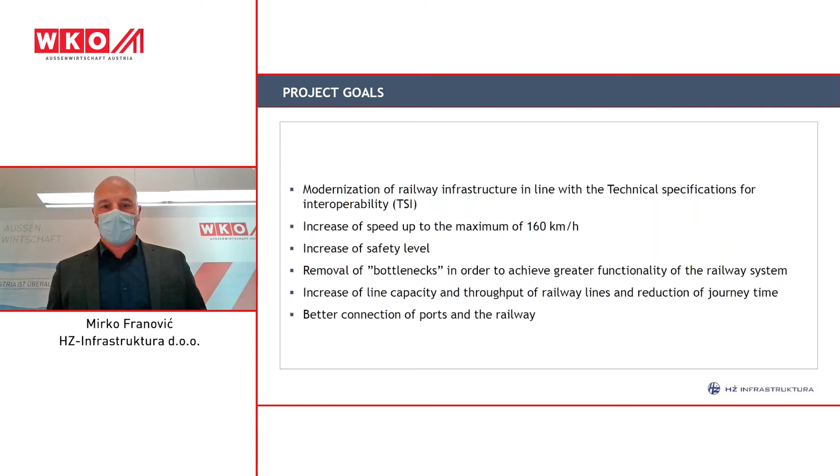So our main objective is to modernize rail infrastructure in line with the technical specification for interoperability, and to increase the maximum speed to 160 kilometers per hour, increase safety level on all of our network, and remove all bottlenecks in order to achieve greater functionality of the railway system. One of the most important goals for us is, of course, better connection of ports and the rail.

So the first project is reconstruction of the existing track and construction of the second track on the section Križevci-Koprivnica state border. This is the most recently contracted contract, and its value is 350 million euros, and we are at the beginning of the construction works on the field. It includes work on reconstruction of the existing line and construction of a second track on the entire railway section, in the length of 42.6 kilometers, and of course all viaducts, bridges and everything on the line is also included. This is done by the Turkish company Cengiz.

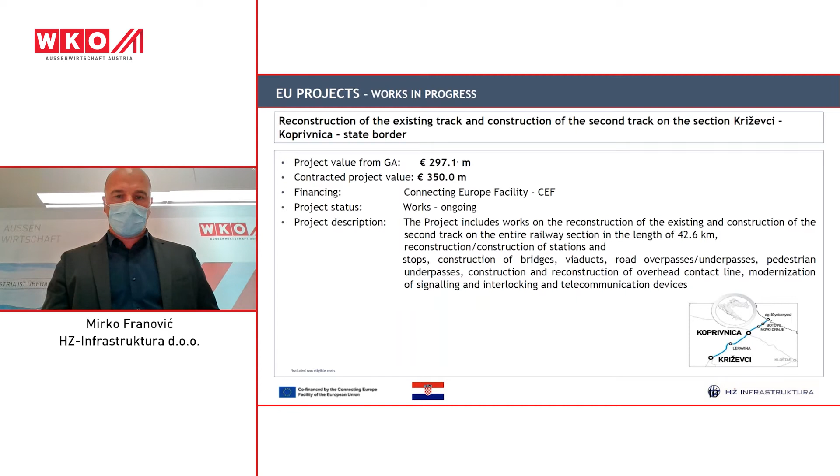The second project, looking from the Hungarian border, is project Dugo Selo-Križevci, and it is approximately 60% finished, and we expect to finish this project in 2022. There were many problems on this project, unfortunately, regarding the consortium, so we are now at least 2 years behind schedule, unfortunately. This is also an EU co-financed project, around 200 million euros, and it's done by a domestic consortium.

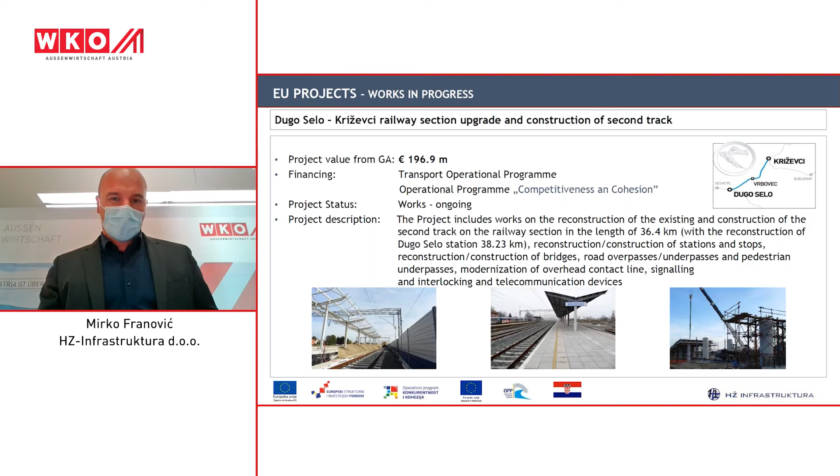Now we are going to today's most interesting project. This is the project from Hrvatski Leskovac to Karlovac, and this project is now in tender procedure for the works. The newest information is that we got another appeal in the process of public procurement, so we expect to get the bids for this project at the beginning of next year.

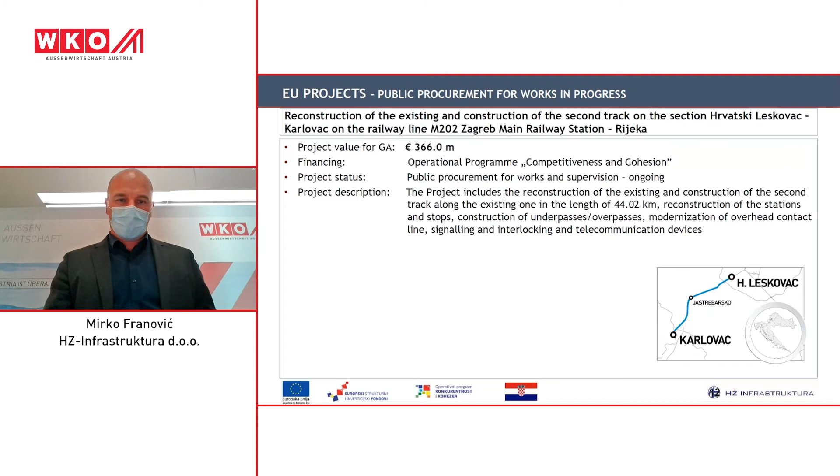This is approximately 366 million euros worth of project. It includes reconstruction of the existing track and construction of a second track along the existing one, in the length of 44.02 kilometers. Also, all the stops and everything else, overpasses and underpasses, will be constructed through this project, so the safety will be higher than it was today.

After this project, we have a project of a completely new track from Karlovac to Oštarije, and we are in the phase of study documentation preparation. We have just signed the contract with the consultant, and we are starting to make the study documentation, environmental impact assessment, and all other documentation. The estimated value of this project is 400 million euros, and we plan to start with the procurement for this project in 2024. So in 3 to 4 years, we expect to be finished with the documentation and to launch the public procurement for the works.

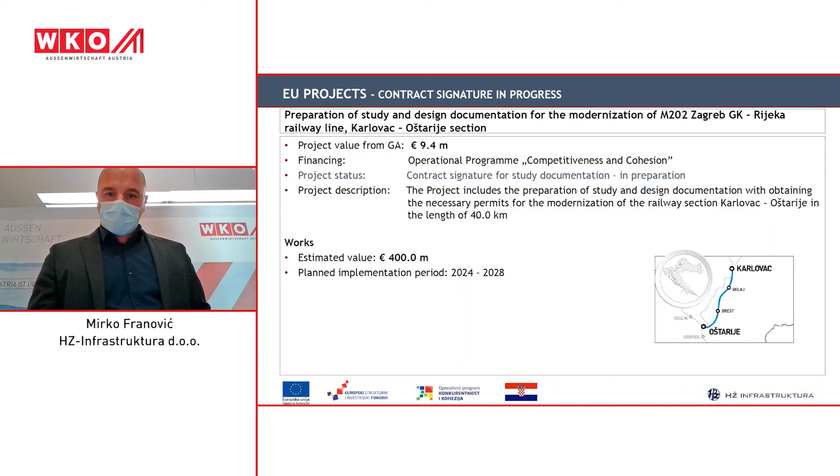On this section continues the most difficult section on all of this part of the Mediterranean corridor, and this is the section from Oštarije to Škrljevo. Also on this section, we are in the phase of preparation of study documentation, and this is a part that still needs to define what route to use. We have two options: to reconstruct the existing one, or to build a completely new line - this is the so-called lowland line, which probably most of you know about. This, I hope, will be defined and decision will be made very soon.

Then we will continue with preliminary design, location permit, and main design and construction permit. The estimated value, as you see on this slide, is 900 to 1.3 billion euros, and of course it depends on the variant that will be picked through this study documentation. Planned implementation period, or beginning of the public procurement for works, we expect to be at 2025. If a completely new lowland line is picked, we expect to have at least 45 kilometers of tunnels, and this will be the most challenging project definitely on this part in Europe.

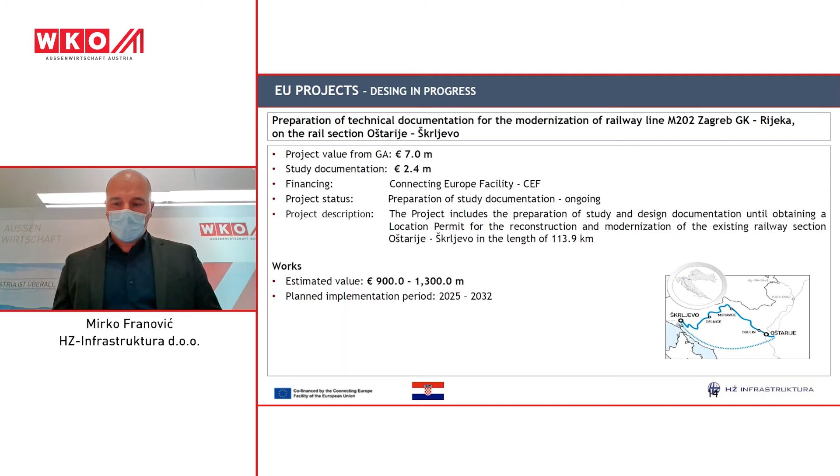Also in the city of Rijeka, going on from the project that we just saw, we have the project of reconstruction and building of the second track on the section from Škrljevo to Rijeka and to Jurdani. On this project, we are in the final phase of the main design and construction permits, so we expect to finish with all of this by the end of 2021 or next year, and be ready to launch the procurement for works in 2022.

This project consists of reconstruction of the existing line and building the second track alongside the existing one, in the length of 27.5 kilometers, and the estimated value is 270 million euros. Also, the project is very complicated because most of its length passes through the city of Rijeka, so there will be much problem in construction phase, definitely.

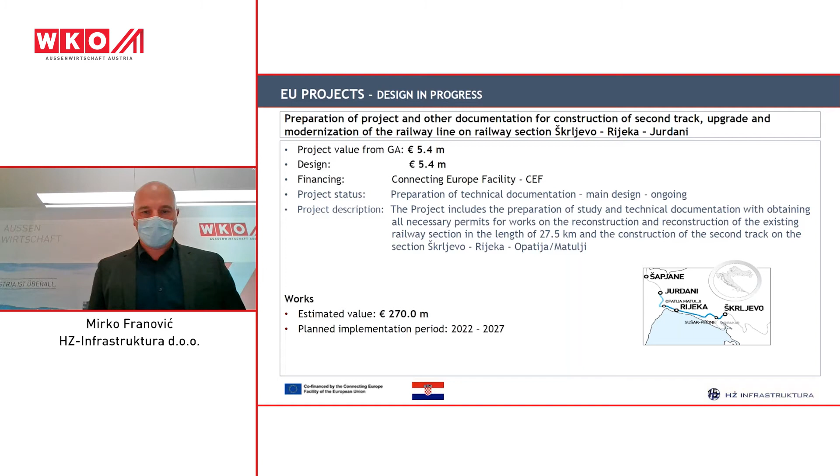So in Rijeka, we have two projects ongoing. One is upgrade of the Rijeka port infrastructure, the Zagreb Pier container terminal, which is at approximately half of its works. The second project is Port Brajdica, which has just got the usage permit from the ministry. So we are finished with it, and we expect to finish all the documentation for EU co-finance.

After reconstruction of these two ports, we expect to have at least 1.2 million TEUs from Rijeka port.

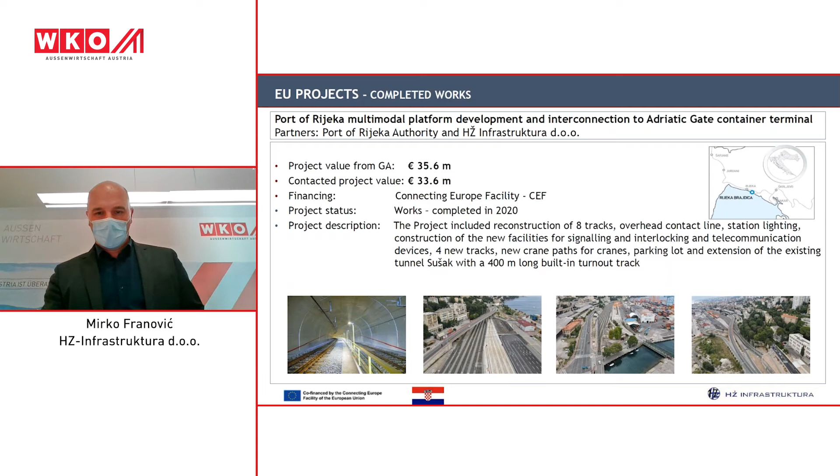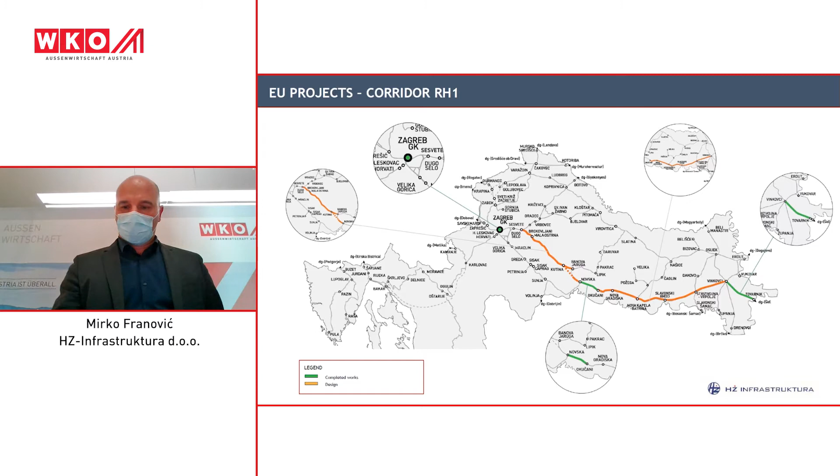Now we are going to our second corridor line, and that's the line from the Slovenian border over Zagreb to Belgrade. On this part, we have realized two projects, Novska-Okučani and Vinkovci-Tovarnik, at the end of the line towards the Serbian border. We have now two projects ongoing in the phase of preparation of documentation, which we will pass through now. So if we start from Zagreb, we have the first project that is of the biggest importance for us at this moment, and that's the project Dugo Selo-Novska.

It's a reconstruction of the existing track and building the second track along it, in the length of 72 kilometers, and the construction of a totally new two-track electrified railway on the section Kutina-Lipovljani.

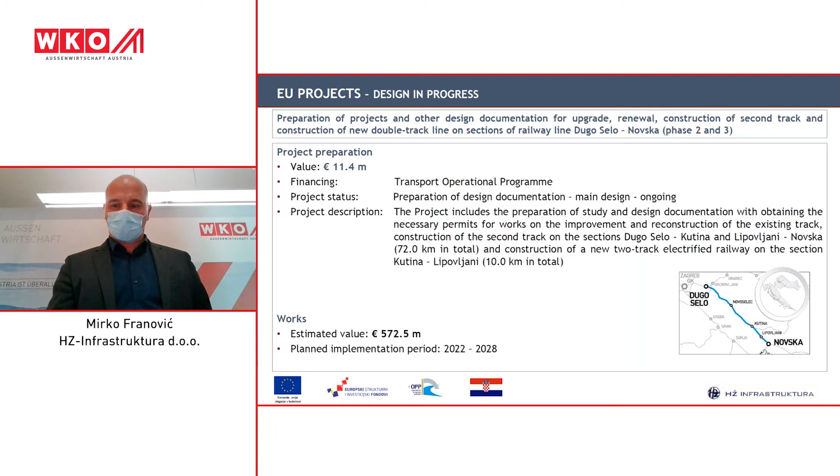So in this project, we are currently at the final stage of the main design, and we are submitting requests for construction permits. We expect to be finished also by the end of summer of 2021 with the construction permitting, and then prepare documentation for tender. This is up till now the most expensive project in HŽ Infrastructure, with an estimated value of around 570 million euros. We look forward to all the Austrian companies applying for this public procurement.

The second project is now in the final phase of study documentation. We got the environmental impact assessment solution, and we are now procuring for the project documentation, preliminary design, location permit, main design and construction permit for this section. This is a renewal of the existing double track line, 131 kilometers in length. Estimated value is around 500 million euros, and we expect to launch the procurement at the end of 2024. This is practically a lowland line, and it's a reconstruction or higher maintenance of the existing line with modernization of all official places, bridges and construction works.

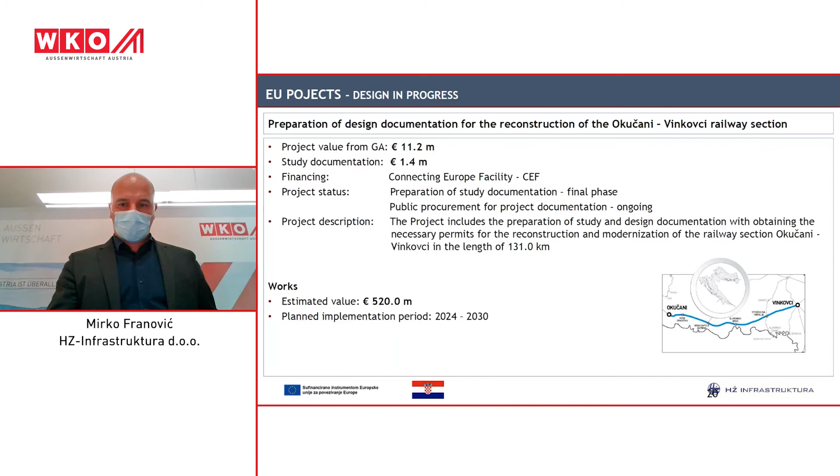On other lines, we have finished, about 1 year ago, the section from Gradec to Sveti Ivan Žabno. It's a local line, and currently we are working on the section from Zaprešić to Zabok, which is 24 kilometers of reconstruction of the existing one-track line.

So these are some facts about the project of modernization and electrification of the line from Zaprešić to Zabok. Its contracted value is 81 million, and the construction works are done by Swietelsky.

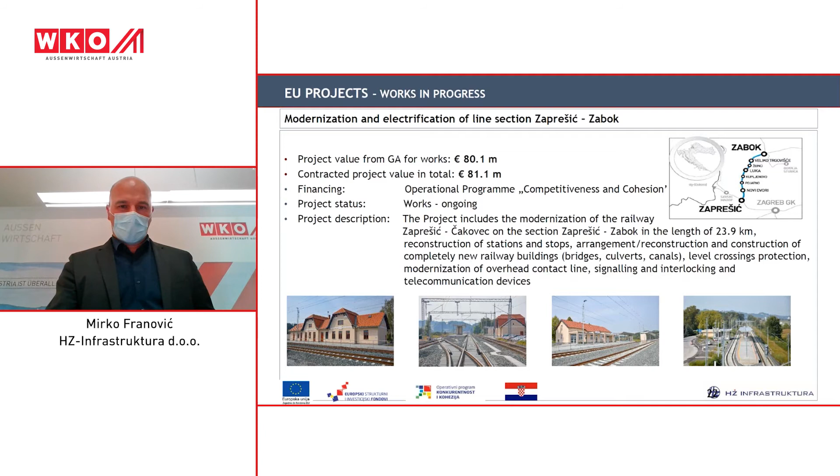One of the projects also ongoing at the moment is the reconstruction and electrification of the line from Vinkovci to Vukovar, done by a Spanish company, Comsa. Estimated or contracted value of the project is 57.5 million euros, and it consists of reconstruction and electrification of the existing line, in length of 18.7 kilometers. We will upgrade the speed on this line to 120 kilometers per hour. This is mainly done because of the port of Vukovar.

So this is the so-called Lepoglava Junction project, and we are now in the phase of preparation of study documentation, analyzing the variants that will be included in the next phase of the projects.

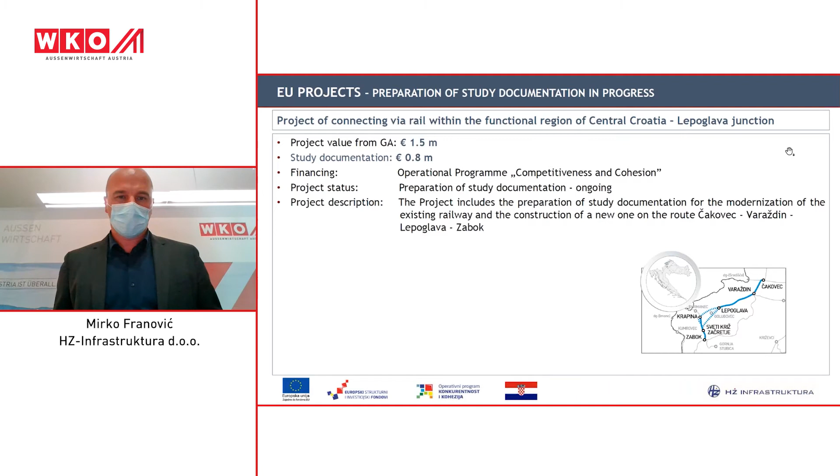These are the EU funds that are financing most of these projects: the Operational Programme Competitiveness and Cohesion, and the Connecting Europe Facility.

New projects that we applied for and expect to publish procurement for include improvement of the railway infrastructure by establishing a monitoring system for safety, security and technical control. The project grant value we got is 17.1 million euros, and it will be financed from CEF. We expect to launch the public procurement for this at the beginning of 2021. We are in the final phase of public procurement documentation preparation.

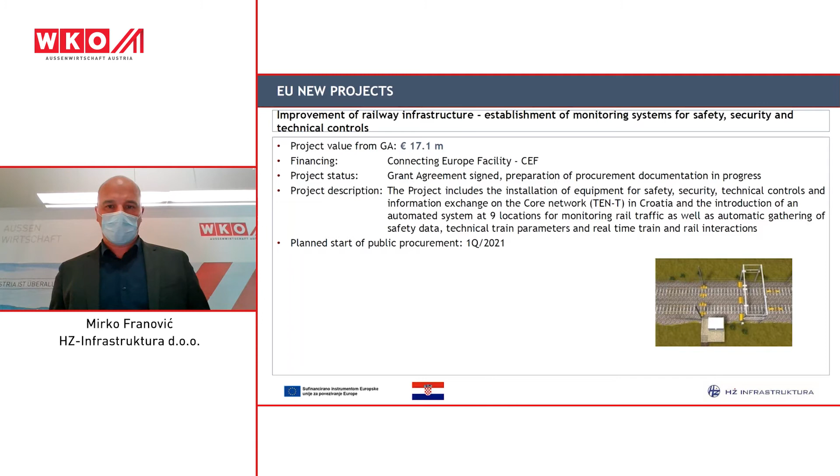Also, the second project that we got financing for is the protection and modernization of level crossings. We applied for an upgrade of 95 level crossings all over Croatia. So also for this project, we expect to publicly procure at the beginning of next year, 2021.

These are some projects financed from EBRD, IBRD, and other sources. One of the biggest is the reconstruction of the section Savski Marof to Zagreb, on which Swietelsky is also working. I must say there are no problems, or not many problems, on implementation of this design. At this moment, from this Sunday, the speed was raised on one section, 6 kilometers long, and we expect after winter to continue towards Zagreb.

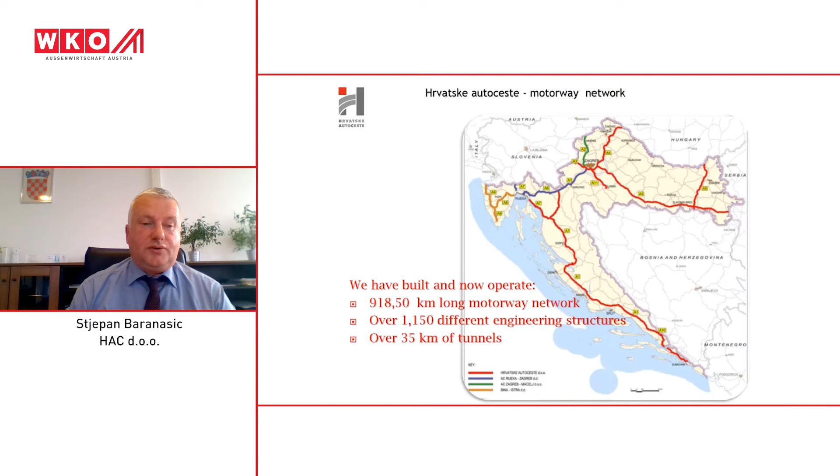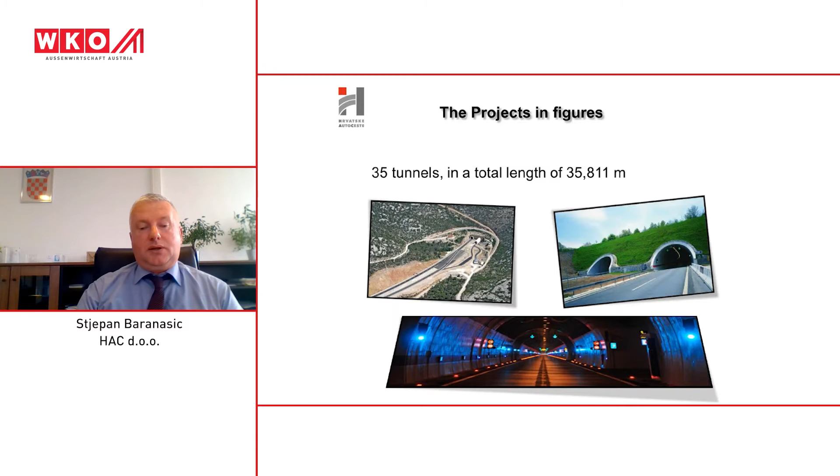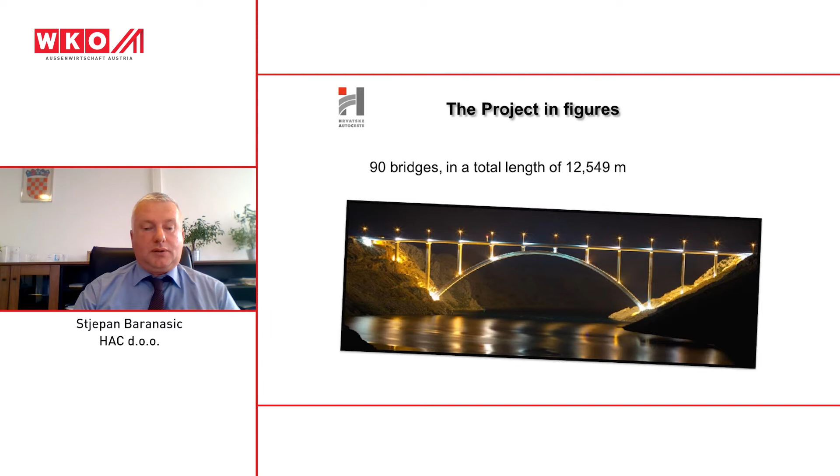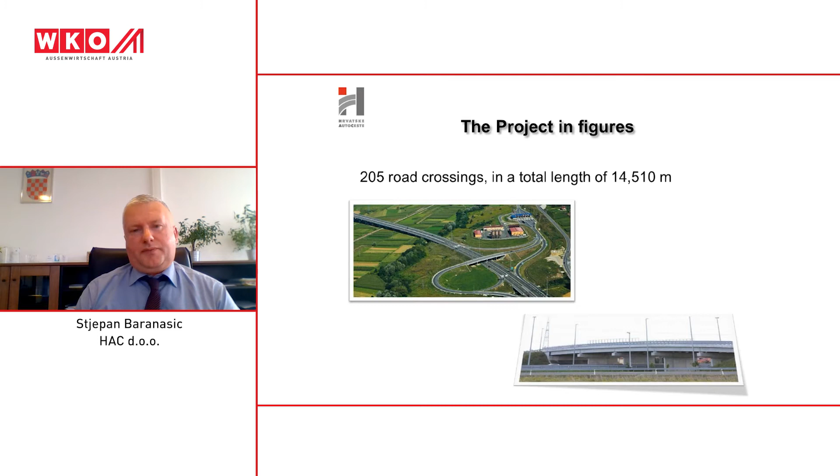We have built and now operate around 918.5 kilometers of motorway network, with over 1,150 different engineering structures, and over 35 kilometers of tunnels. We have 35 tunnels with a total length of 35,811 meters, 90 bridges with a total length of 12.5 kilometers, 100 viaducts at 27 kilometers, and 205 road crossings with a total length of 14.5 kilometers.

Some figures are not yet completed for 2020, but we have data from before COVID. In 2018, revenue was 1.9 billion kunas, an increase of 6.45%. But in 2019, before COVID, revenue was 2.2 billion kunas, also an increase of around 5%.

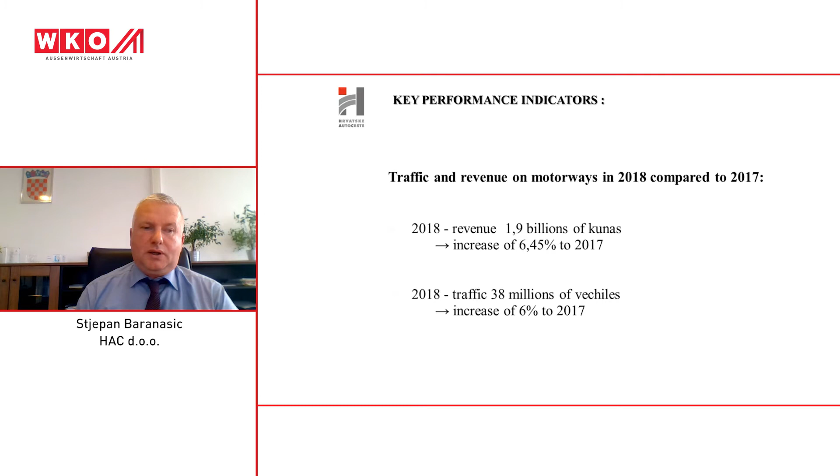Something about the reform of the road sector: we are implementing a new system. We are about to implement a new toll collection system, and we are implementing new maintenance and management of road assets.

In the current investment cycle, the company plans to complete a few important projects. This is corridor 5C, part of the A5 Beli Manastir-Osijek-Svilaj motorway, the A7 section of 56.5 kilometers. Design documents are ongoing, and we plan to renovate the LED technology and improve energy efficiency on our highways, especially in tunnels, as well as improve passive safety systems.

Of course, we do our best according to the quality assurance policy. We act responsibly towards the general public, because we are a public company. Our services are adjusted to meet the needs of motorway users. We follow environmental protection regulations, and the health and safety of motorway users is our priority.

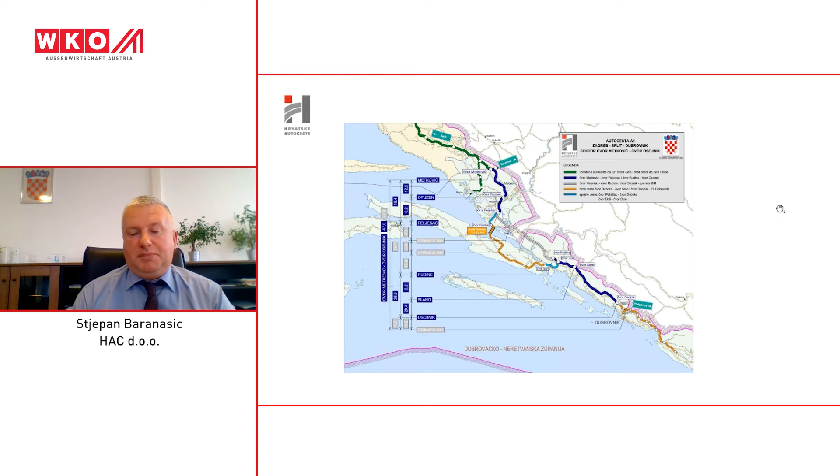The estimated value of this part is 5.15 billion kunas. So the total value of the south part, from Node Metković to Node Osojnik, is 9.1 billion kunas. This is the south part.

Now we can go to the north part, which is called A7, and which is the part of the Rupa-Rijeka-Žuta Lokva. So the Križišće-Žuta Lokva sector... okay, this is the map.

The Križišće-Žuta Lokva sector is also part of the Adriatic traffic route, planned as the European road E65, partly E61, which connects the coastal areas of southeastern Europe and provides quality connection to urban, tourist, and industrial centers of the region.

In addition to international and national importance, the A7 motorway is of exceptional regional and local importance, enabling the further development of the Crikvenica-Vinodol Riviera, first of all, and then Senj, the city of Senj, and the Velebit coast, as well as the islands of Krk, Cres, Lošinj, Rab, and Pag.

The construction of the motorway sector in question has been included in the EU accession negotiation in the transport chapter. So something about that part: the Križišće-Žuta Lokva sector, with a total length of 56.5 kilometers, is located in the coastal area of the eastern part of Primorje-Gorski Kotar county, and the western part of Lika-Senj county.

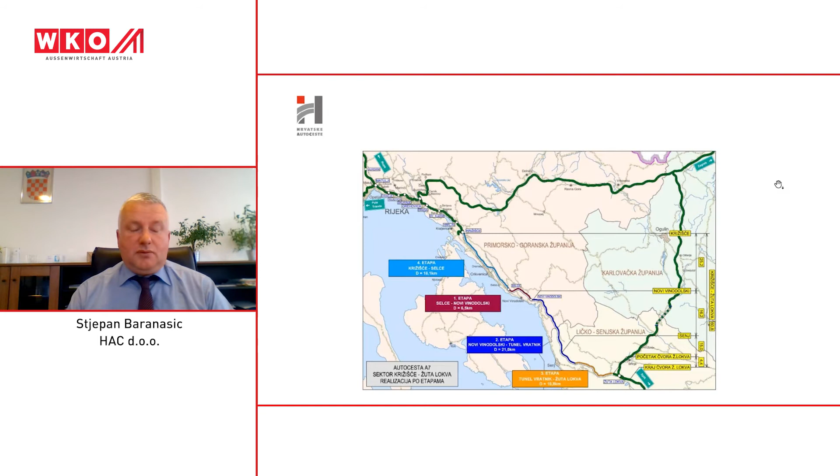So there's a lot of technical data here. I will send everything that is possible from the technical point of view to everybody. We are open for questions, and of course it will be much easier to communicate by email and explain everything that can't be covered in this limited time.

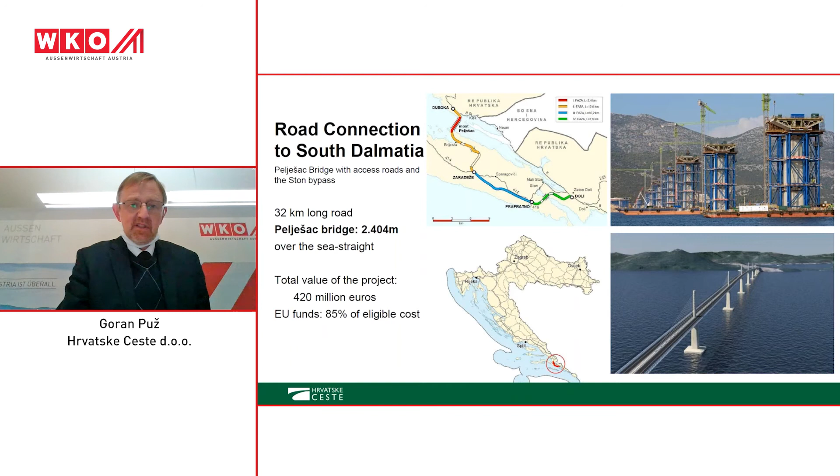Road that connects the Croatian Motorway Network with the Port of Rijeka. I already described why we are building it, and it is a very, very expensive road — 64 million is a contract for 3 kilometers of road.

It's very expensive because it passes through a tunnel and through the densely populated area of the town of Rijeka. Just for illustration, we have to demolish 60 houses in order to build this road. So it has started — we have a contractor, and we expect the tunnel to be bored very soon.

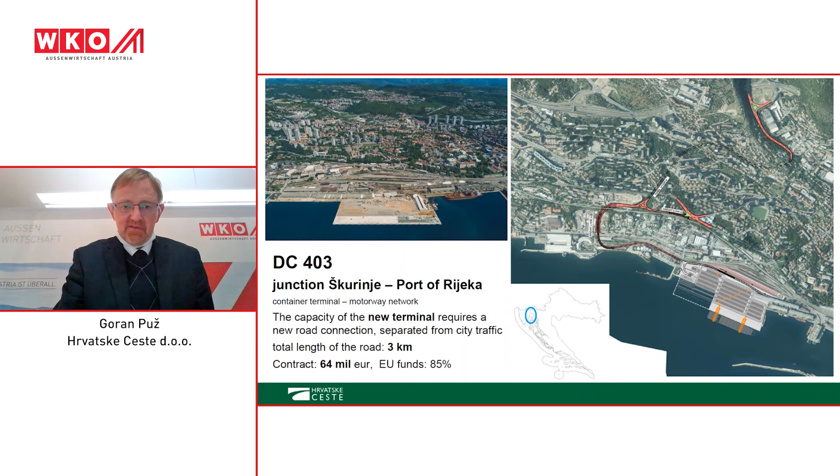Then we have the Split bypass, 21.5 kilometers in length for the remaining part, because half of it — the northern part — has been completed, and now we are to build the southern part. It's an area of very rough, mountainous terrain.

So there are a lot of objects, tunnels and viaducts, and it is going to be contracted in parts. The red parts are predictable in public procurement or close to public procurement, and the green parts are to be discussed a little bit later.

Right now we have construction in progress on the Omiš side. You see the canyon on the top left picture, and on the left side of the canyon you'll see the exit to the tunnel that goes up on the slope, where the Croatian and Austrian company Strabag will build a new bridge from tunnel to tunnel across the canyon. Very, very impressive building, contracted for 24 million euro, going through the tunnels.

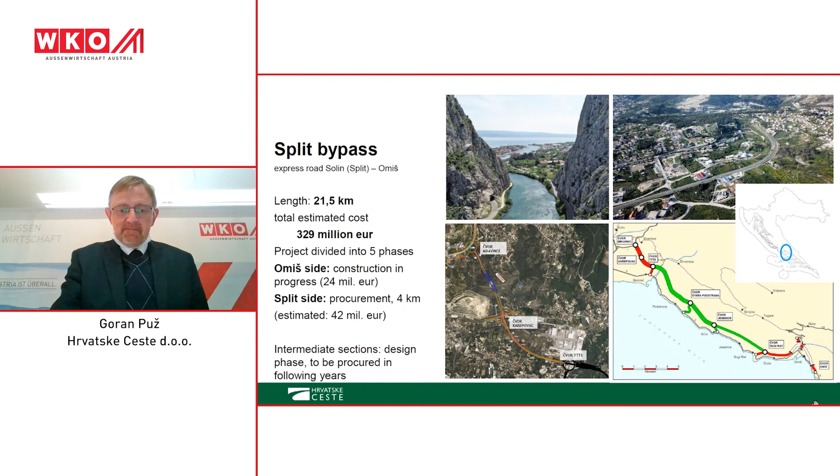This is on the Omiš side, and from the Split side, we are in public procurement right now for 4 kilometers of road, with an estimated value of 42 million euro. Whenever we are close to the town, we have such relatively huge sums for contracts, but that's how it goes.

Next road is also part of a wider idea. Right now we are connecting a border of Bosnia and Herzegovina with the A3 motorway. From border to Okučani we have 8.5 kilometers. Total estimated value of this will be more than 65 million euro, divided into 3 phases.

Phase 1 is in construction, but phase 2, which is a little bit less than 40 million, is right now in public procurement. I found out only today, so I didn't put it in my presentation, but we have a public procurement for phase 2, which will contain the border crossing part. That's why it's expensive - it's 4 kilometers, but it contains a huge area for the border crossing, for customs. And you can see on our picture that the bridge already contracted is advancing very nicely.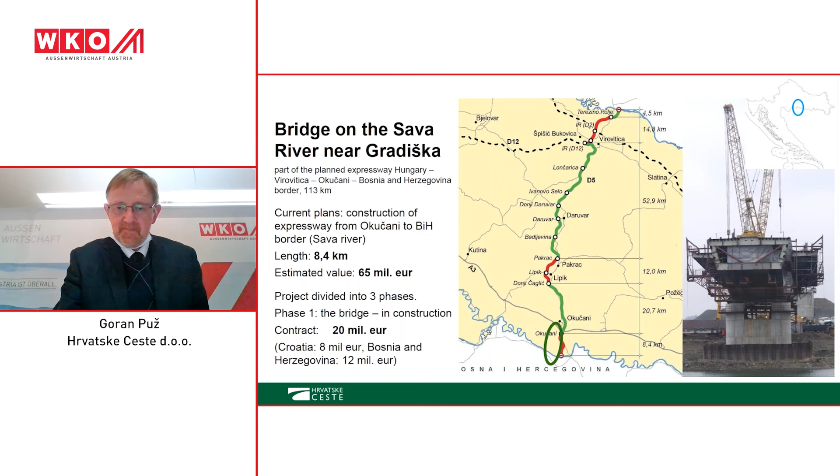So you get the picture of how we procure our projects. We have our goals, and we are advancing as fast as our budget restraints allow us.

We have this project which will connect Zagreb with regional centers in northwest Croatia, called Podravina Y. Right now we are contracting and procuring parts of the road on both branches of this Podravina Y. You can see we are advancing toward the Hungarian border in both directions.

So we are advancing not only in length but in width. We are not contracting the full width of the fast road - it's not a highway, it's not a motorway, it's called an expressway. We are building expressways, not motorways, and building only half of the expressway, procuring only one pavement, only 2 lanes of the road. But we are making room for another carriageway to be built once traffic reaches a certain value.

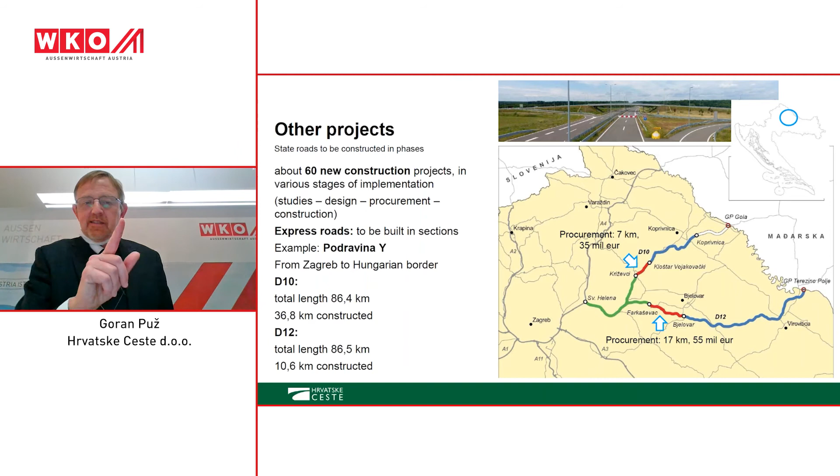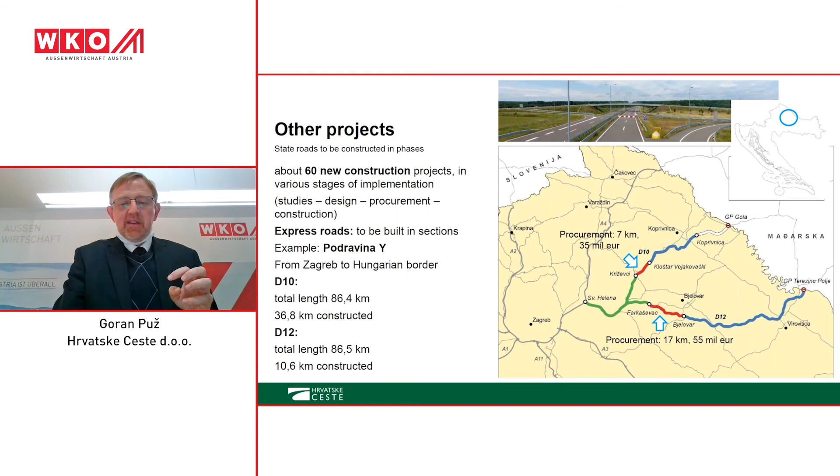We have something like 60 new construction projects in various stages of implementation. We are planning more roads than we can build with the current budget restraints, but we have several projects, and depending on available money, we decide which ones to start. So we are trying to make way for balanced development of all parts of our country.

We are starting, with the help of European funds, with 4 kilometers of bypass around 2 villages at the start of this project. This is also in procurement right now. So this is the basic principle - we have several designs waiting to be procured, like the ones I mentioned.

I must say that we are building, procuring, designing, planning, or studying dozens of bypasses. This is a big area for us, because in many small towns or villages, our state road passes right through the middle of the town or village, and we need to build the bypass because it's very uncomfortable for life in these areas to have heavy traffic inside these towns and villages.

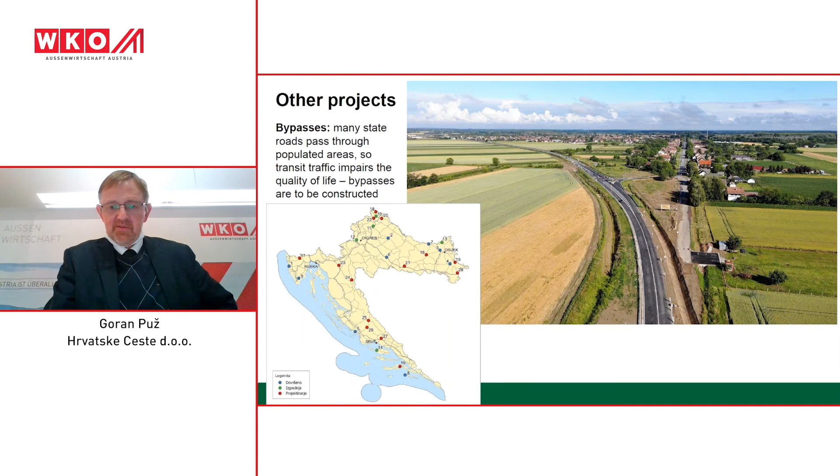I think we have 27 projects like this that I've counted on this map, and this one is characteristic. In this particular place shown on the photo, we have about 4 kilometers for 8 million euro. These are standard jobs for us.

Aside from that, we are also procuring many reconstructions. We have about 600 active projects, but we don't expect to complete all of them in the next 4-year period. But we are doing as much as the budget restraints allow.

Reconstruction doesn't only mean making new pavement on the existing road. We are trying to straighten some curves to make traffic safer, and we are also constructing a new path for bicycles and pedestrians through all the towns where we reconstruct the road. That's our obligation. We are also reconstructing the crossroads. Right now we are building a lot of roundabouts - it became a kind of fashion. Every town or village needs one or two roundabouts instead of ordinary crossroads.

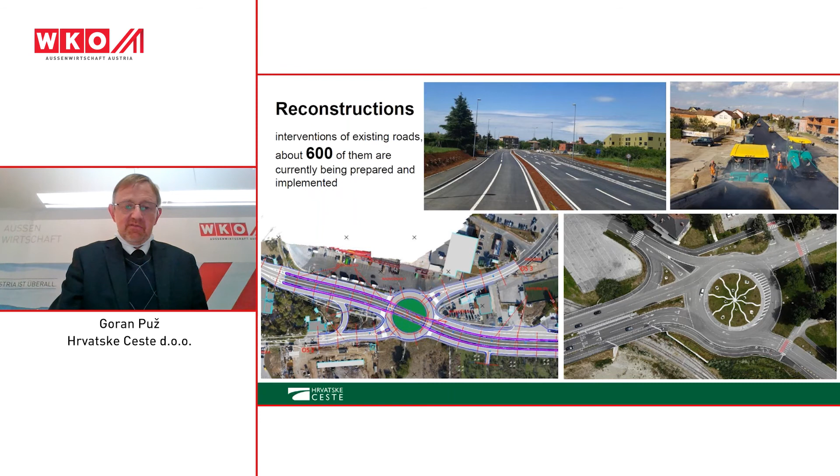So this is the extent of our investment projects right now and in the next few years. As I said at the beginning, we were expecting a reduction of investments in capital infrastructure. That was the first and very normal reaction by our government and our ministry, which is in charge of us. But as time passes, it becomes obvious that only new investments can become a generator for the economy, for new economic growth in days of crisis. So for now we are quite optimistic, and optimistic means that we intend to keep the level of our investment in the near future. That would be all for me. Thank you very much, and bye.

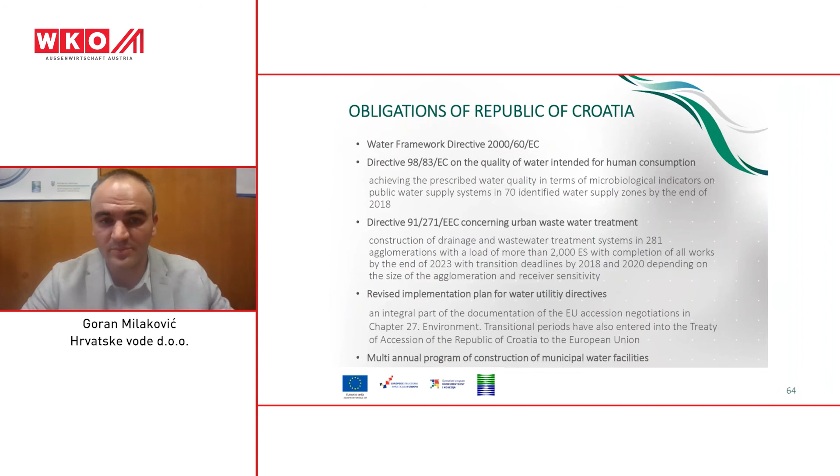Currently, through the Operational Program Competitiveness and Cohesion, we have 60 approved projects and 5 projects in the pre-approval procedure, giving a total of 65 projects. Approved projects are valued at 20 billion kunas of total eligible expenditure, or 14 billion kunas of EU grant, and the 5 projects in the pre-approval procedure total 1.69 billion kunas of eligible expenditure, or 1.17 billion kunas of EU grant.

The usual components of the water and wastewater projects are construction and reconstruction of the sewage system, construction and reconstruction of the water supply system, and construction or upgrading of wastewater treatment plants. In terms of investment amounts, around 90% goes to the sewage system - reconstruction and construction of new ones - and about 10% goes to construction and reconstruction of the water supply system.

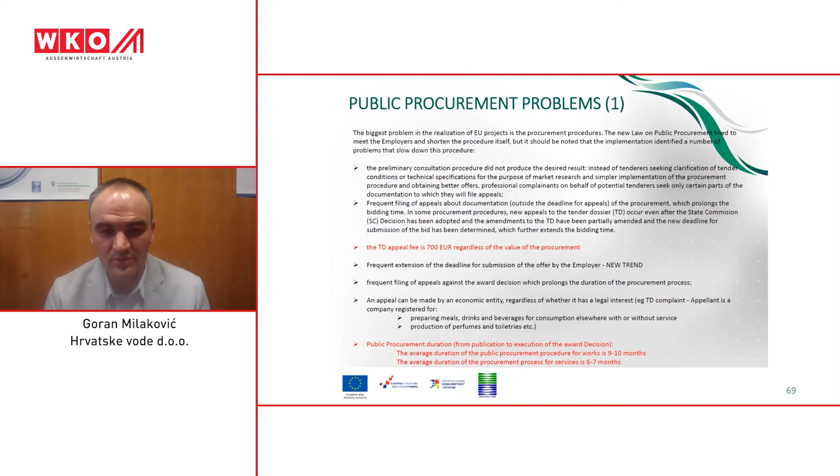Summarizing, the public procurement duration from publication to execution of the award decision - for works type contracts, the average duration is 9 to 10 months, and for service procurements, the average duration is 6 to 7 months.

Here I have provided some characteristic examples. For project Donja Dubrava, the final beneficiary had 10 tender dossier appeals, 9 of which were dismissed as unfounded or untimely. The initial tender notice was in June 2018, and the tender opening was in April 2019 - so from tender notice to tender opening, 10.5 months passed.

Another example with the same final beneficiary, project Mursko Središće: there were 6 tender appeals, all dismissed as unfounded and untimely, and from tender notice to tender opening, 5 months passed. Project Rijeka.

The initial tender notice was in December 2018. There were 3 tender dossier appeals, all of them dismissed as unfounded or untimely. The predicted date of tender opening is unknown. Why? Currently we are in December 2020, and we still do not have the bids open.

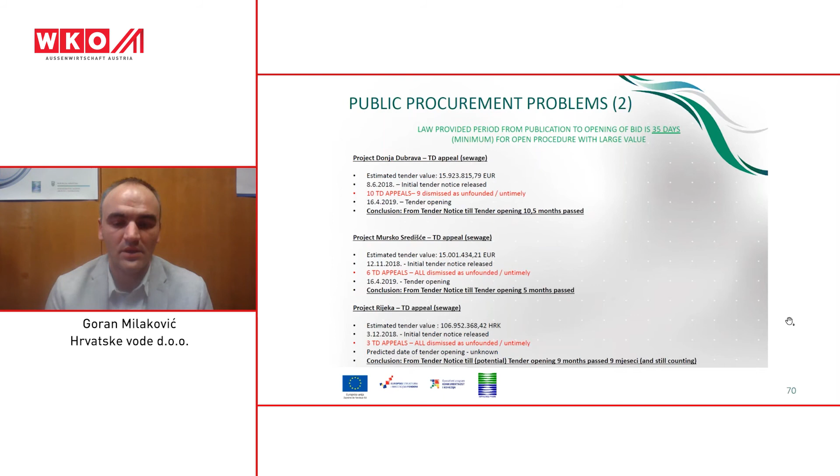To be precise, this is the second public procurement. In the first one, the prices were extremely high, so the final beneficiary terminated it and started a new one. I'm saying this because, looking at the time duration of public procurement on these projects, we have 2 years since the procurement was published and we still do not have normal offers.

As I mentioned, another problem we are facing is the increasing of project costs. Current statistics show that on sewage systems, 28.5% of bids are above the estimated tender budget. If we separate that into the Dunav River Basin and the Adriatic River Basin, 21% of bids are higher than the estimated tender budget on the Dunav River Basin, and on the Adriatic River Basin almost double, 46% above the estimated tender budget.

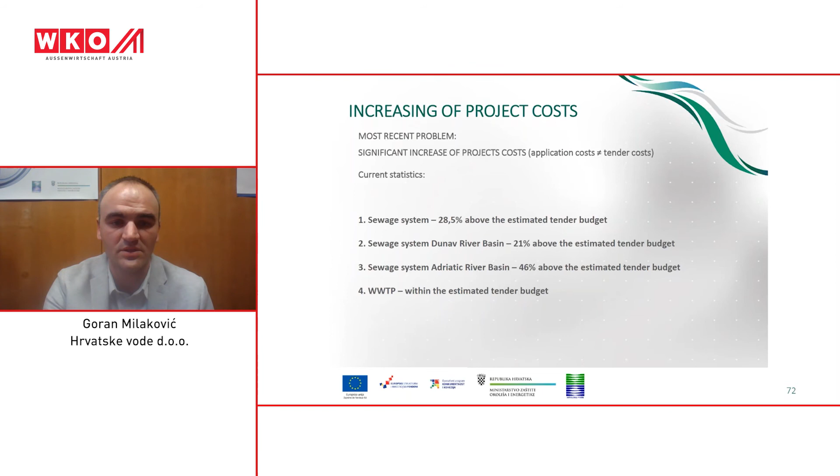Wastewater treatment plants, on average, are within the estimated tender budget, but on separate procurements we are also facing these problems. So as I said, this is an average - the procurements and bids are within the estimated tender budget.

Problems in contracting and implementation include delayed award decision making due to increased bids, delaying award decision making because of fear of financial corrections, slow dynamics of work execution than planned, which is a problem on all projects, and bankruptcy of contractors. Here I gave two specific examples, project Vukovar and Osijek, and financial corrections as a result of ex post controls of the procurement process.

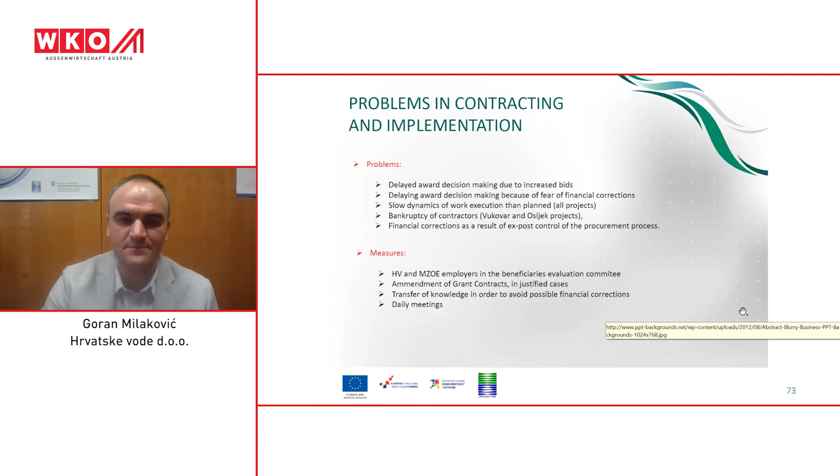Consequently, planned payment in the following period, also for the following 3 years: in 2021, 2 billion kunas, in 2022, 3.7 billion kunas, and in 2023, 5.2 billion kunas.

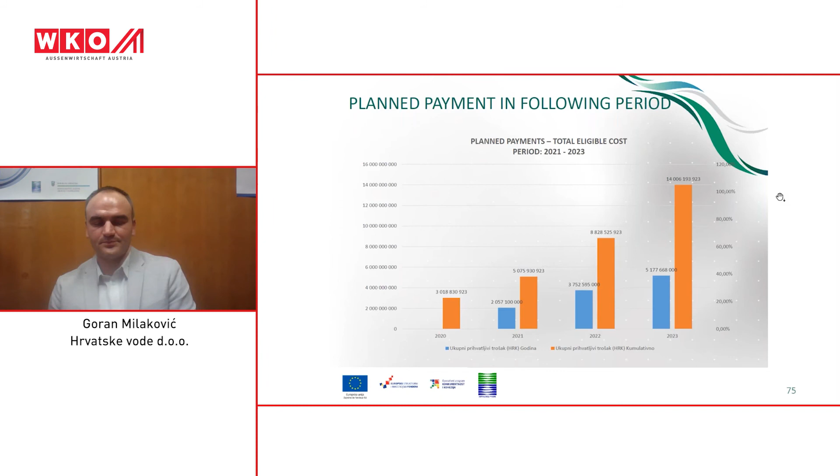Now we are going to the second part of the presentation, flood projects, where we have 5 approved projects. The first one was the preparation of studies for flood risk management projects, valued at 38 million kunas of total eligible expenditure. The purpose was preparation of basin level studies for 12 river basins with significant flood risk for the Sava River in Croatia, and preparation of studies for the VEPAR projects, which you will hear about a little bit later.

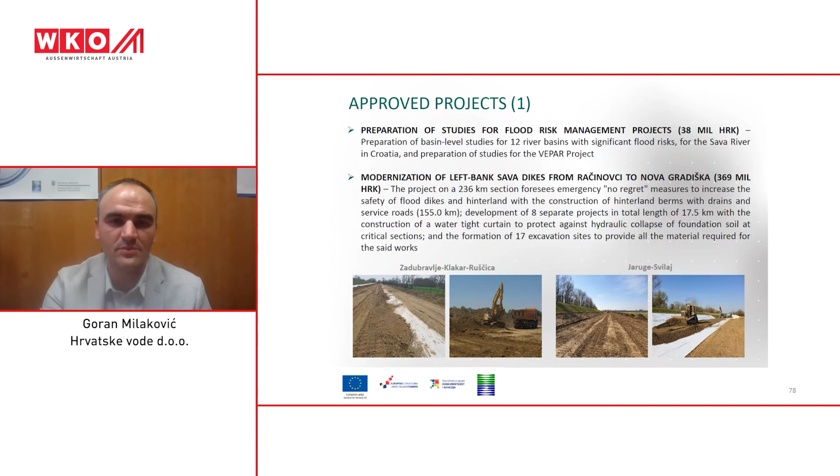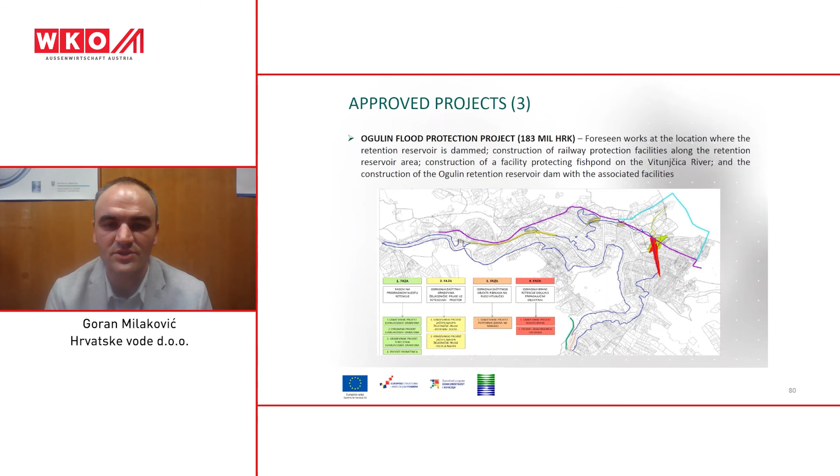Procure the equipment required for more efficient operational flood defense, and educate and inform the public about flood risk. The fourth approved project is the Ogulin Flood Protection Project, total value 183 million kunas. It foresees works at the location where the retention reservoir is dammed, construction of railway protection facilities along the retention reservoir area, construction of a facility protecting the fish pond on the Vitunjčica River, and construction of the Ogulin retention reservoir dam with associated facilities.

The last and biggest project, the Karlovac-Sisak flood protection project, is still not approved, but hopefully by the end of January 2021 it will go to approval at the European Commission. The value of the project is around 1.2 billion kunas. The first phase, implemented through the Operational Program Competitiveness and Cohesion, is valued at 680 million kunas of total eligible expenditure.

The project will provide required flood protection to the town of Karlovac and other settlements along the Kupa River from Karlovac to Sisak, which are frequently and heavily flooded. It will also improve the capacity and operation of the natural Kupčina retention reservoir with construction of facilities at the Brodarci Dam upstream of Karlovac, and extend the natural flood storage area of Odransko Polje. The project foresees reconstruction of dikes and construction of other facilities to improve the functionality of the flood protection system as a whole.

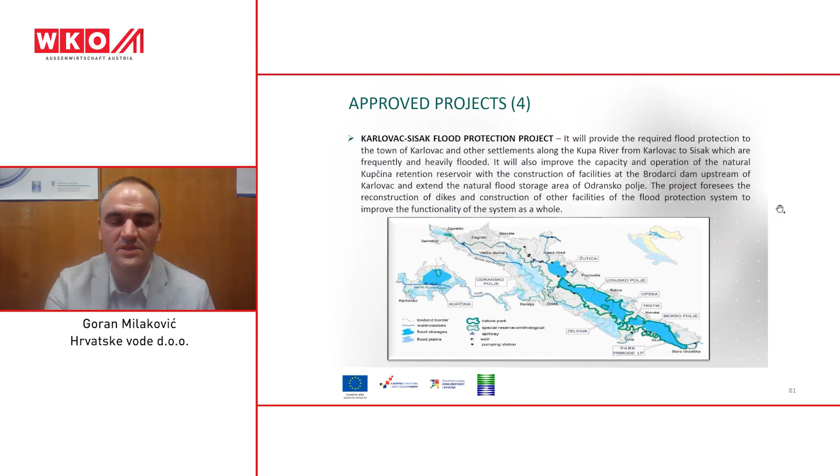I didn't mention the new operational program for 2021-2027 because we still do not know the investment value for the following programming period, but we know there will be a decrease in investment in water and wastewater projects. In this programming period 2014-2020, Croatia got 2.55 billion euros from the cohesion fund, and for the following period, 2021-2027, we will get only 1.5 billion euros, meaning a decrease of 1 billion.

That will be all from me, and now I'm handing over to Sonja.

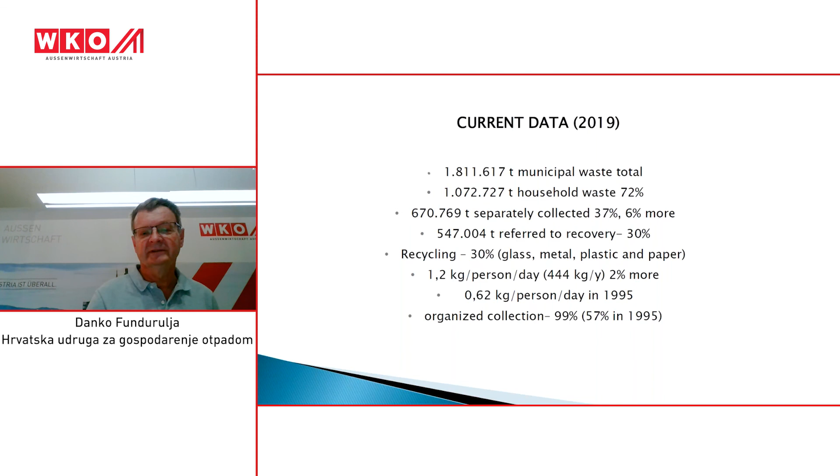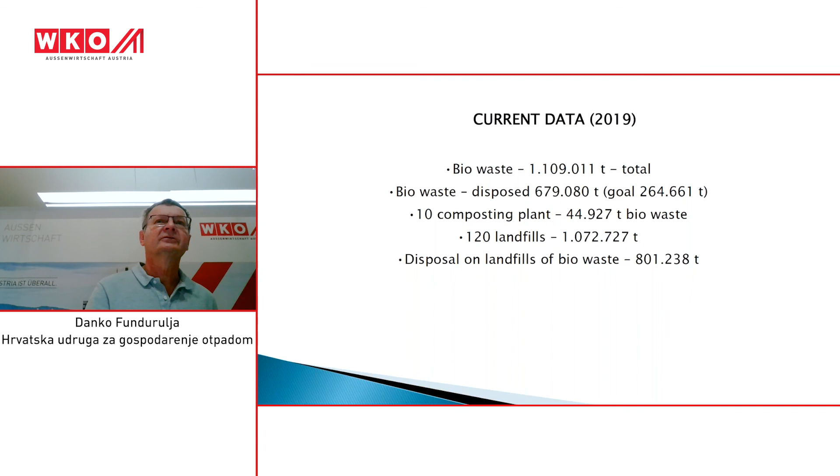The main problem is bio-waste - we produce 1.1 million tons of that 1.8, and 680,000 is disposed on landfills. Now we have about 120 landfills, and we hope that bio-waste, by separate collecting and designing and building composting plants, would be a priority in the next 5 years.

In 1995 we started negotiation with the European Union, and in 2004 we finished chapter 27, meaning we finished everything in waste management in the best way. The 3 main goals were: we must close and remediate all irregular landfills, which were 312 at the beginning; remediation of the black points; and construction of waste management centers.

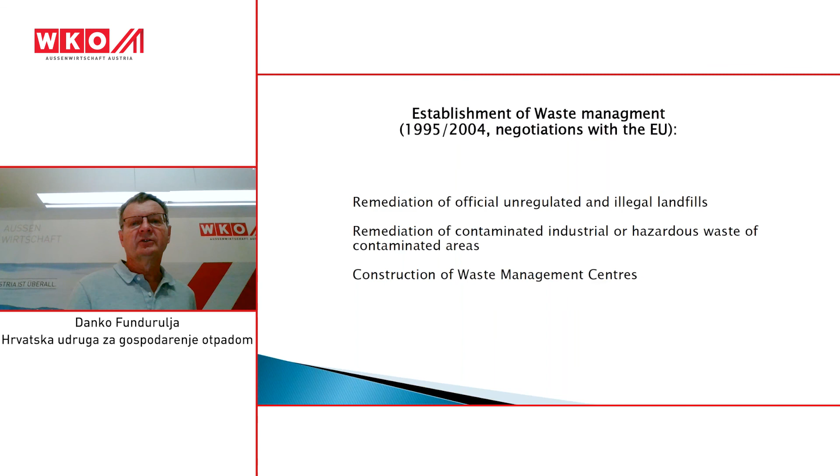It's now clear that we would have 11 centers in Croatia. The main legislation, the law about sustainable waste management, had its last changes last year, but now we have finished the new law, and I hope at the beginning of next year it would come into force.

Then we have a lot of ordinances dealing with waste management, about 27, and a strategy which is now near the end. The strategy is from 2005, and the last waste management plan was made in 2017, to be finished in 2022.

We entered the European Union, and of course we need to implement all the European directives in our legislation. The last European directive on waste is still not implemented in our current law. So these are two main goals which unfortunately we didn't make.

Till the end of this year, we can dump only 265,000 tons of bio-waste, and you saw in the previous slide that now more than 600,000 was dumped. So without building a composting plant, it would be impossible.

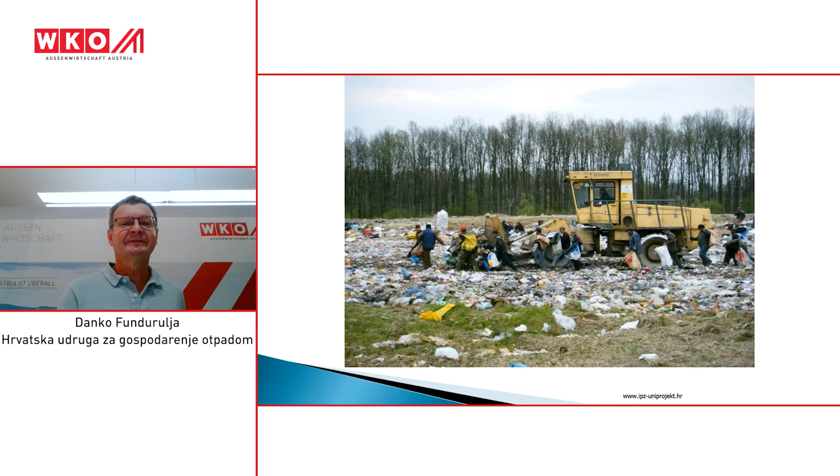This is how it looked 20 years ago, and now it doesn't exist anymore, but this recycling and separate collection was organized by third parties on the landfills.

It's very important to do sorting of waste, characterizing household waste, which we did over the last 3 years in different parts of Croatia. It was done in Zagreb 4 times 2 years ago, and now this year we finished two regions, Slavonia and Middle Slavonia.

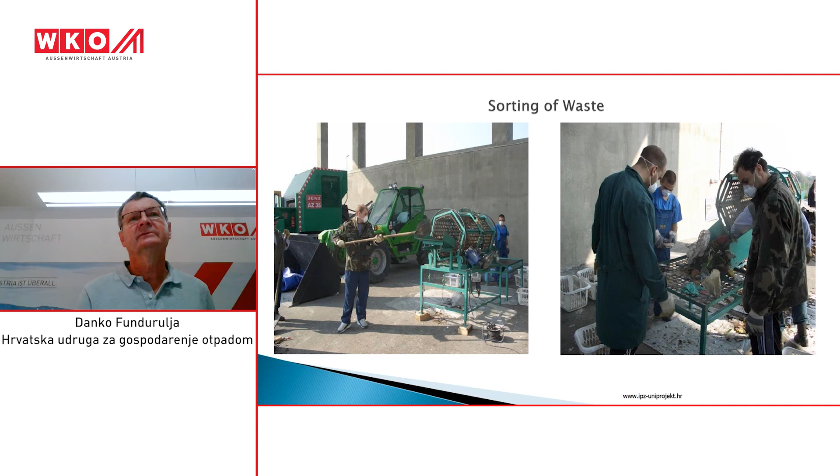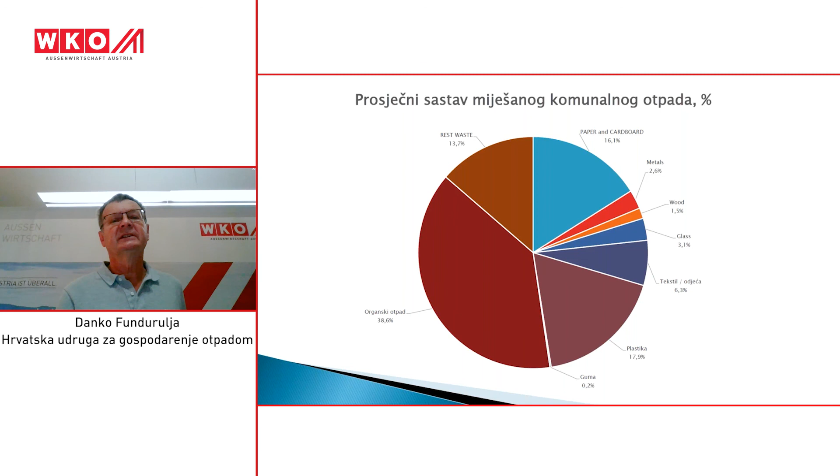In this pie chart, you can see that more than 38% of complete mixed waste is bio-waste. Then you have approximately 17% paper and cardboard, and plastic. In all, more than 70% has to be separately collected, and it's possible.

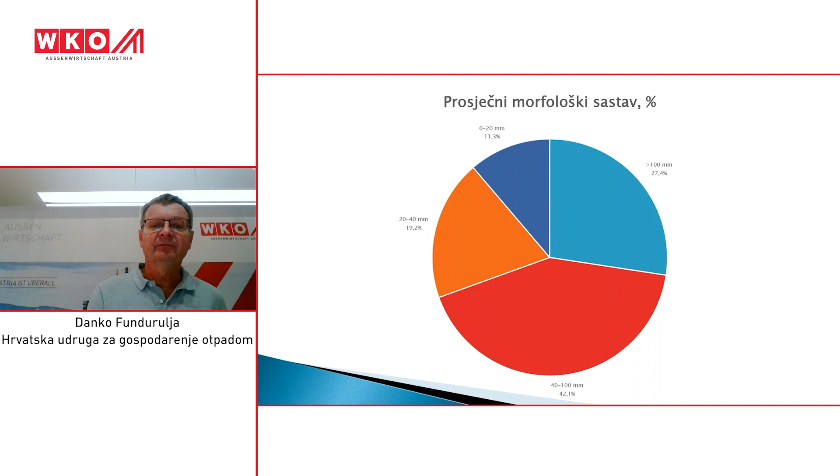If you look at how big the waste particles are: bigger than 10 centimeters is 27%, and a small part 0 to 20mm is 11%. The main part is 40 to 100 millimeters, which is 42%.

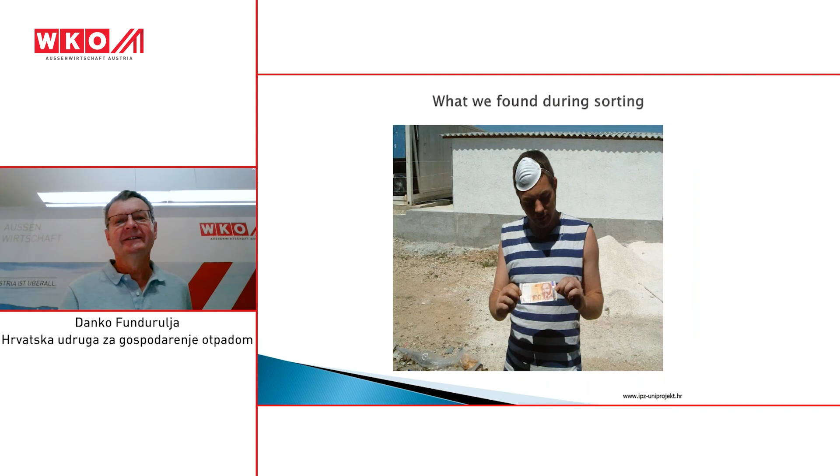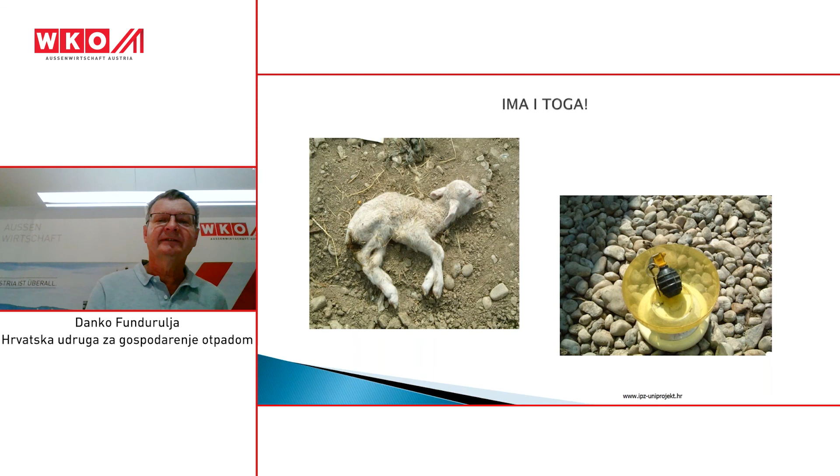That's just to show you how we do it. We find a lot of different things in waste: money, animals, dead animals, and it's important that we still find a lot of arms at home. It's dangerous because we found bombs and such things.

So in negotiation, I told you we have to build 11 waste management centers. 2 are built, so 9 of them are still left. In the waste management center, complete communal waste would enter and be treated there.

Still now we don't have any waste-to-energy plant, unfortunately. But it's also important for you to know that all these centers must be run by a local authority.

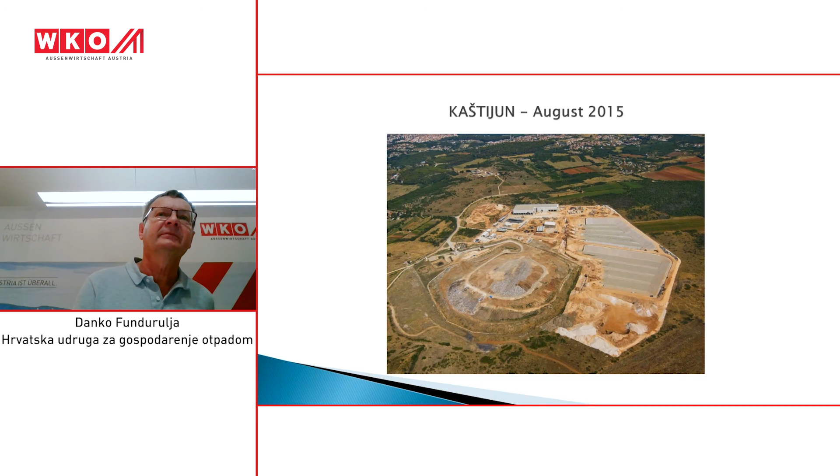So perhaps public-private partnership would be possible. This is the center which has worked for 1-2 years now, it's Kaštijun in Pula.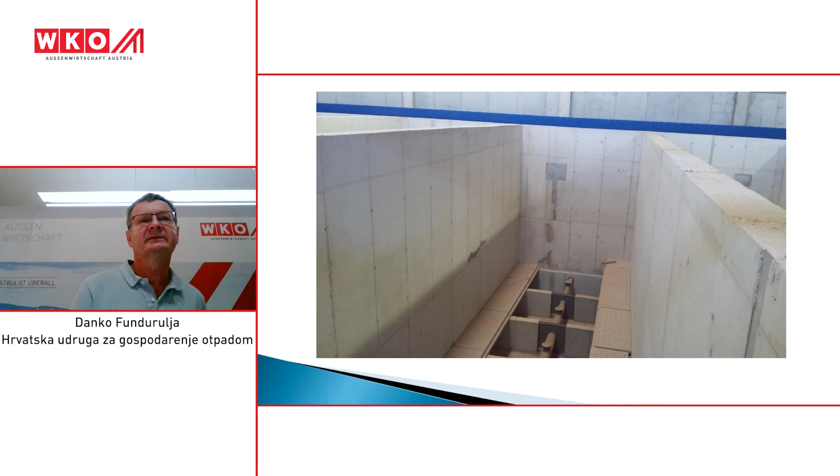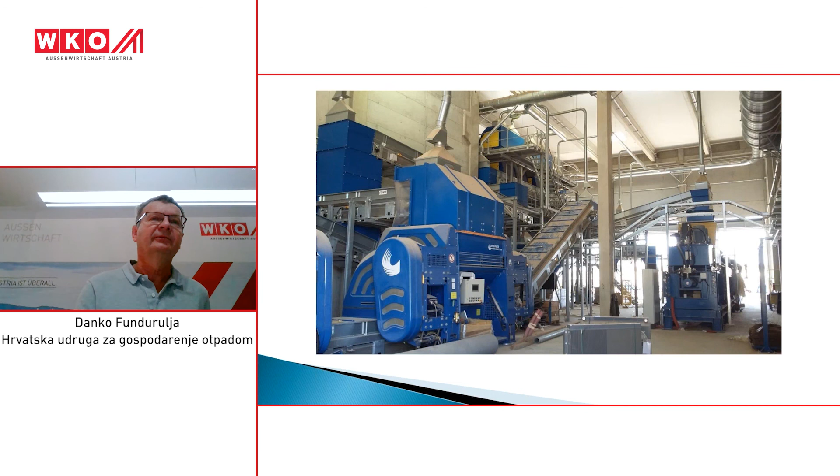For you, it's perhaps a strange technology. It's bio-drying. That means first we separate on one part compost, that's the hard part of the waste, and the light part, which would be SRF or RDF, refuse-derived fuel for energy.

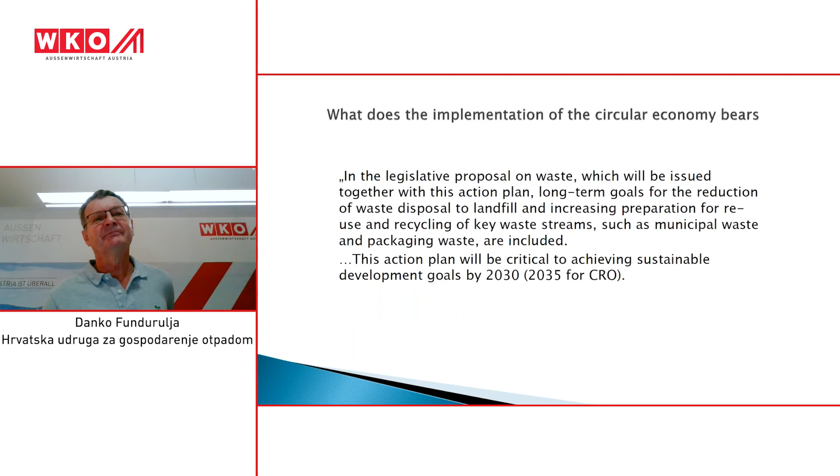5 years ago, when the European Union started the action plan for circular economy, we had to implement it, but as everything in Croatia goes very slowly, this plan is still not completely implemented in our legislation. This is important to remember for Croatia: in theory, everything is known and nothing works. In practice, everything works and nobody knows how or why.

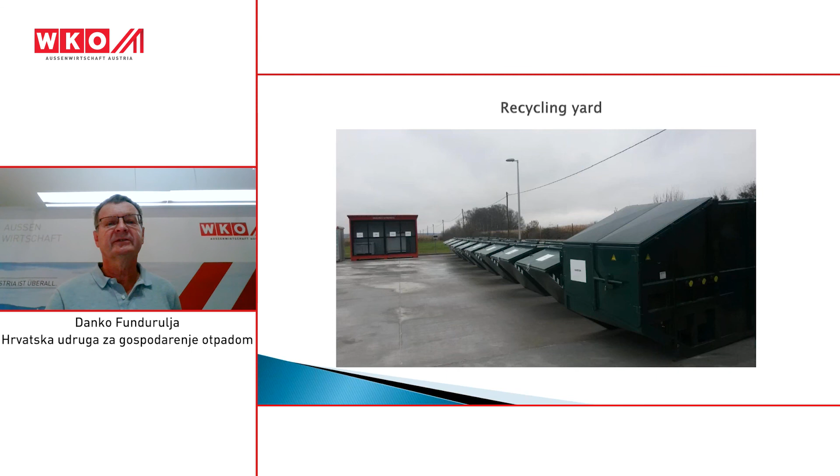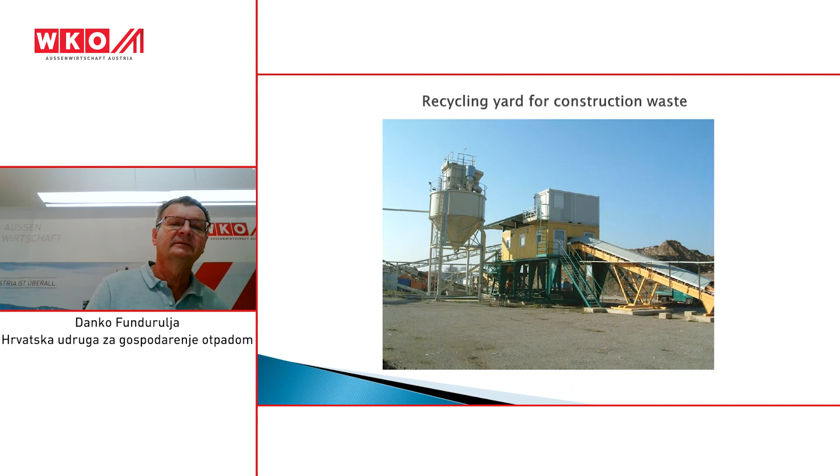So we built more than 100 recycling yards where we collect different parts of waste - more than 30 types of waste. We have one big recycling yard for construction waste, and this construction waste collection can also be done by private investors.

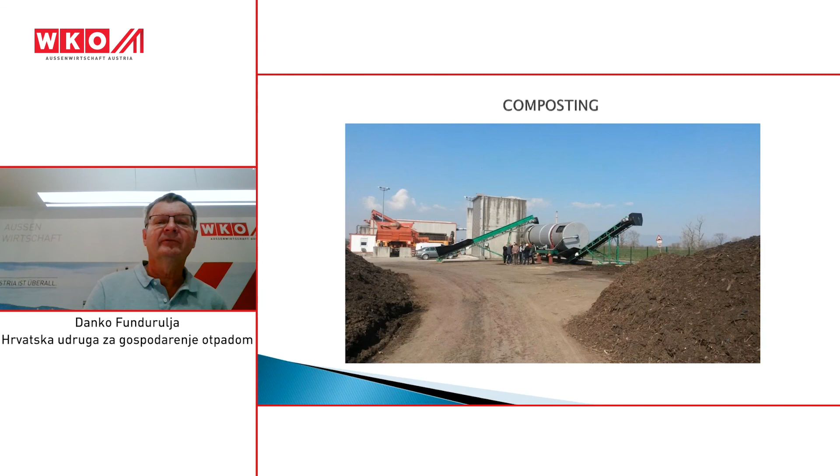In Zagreb, you have two big composting plants. One is on the Jakuševac side, that's the old landfill, and another is in a different part of Zagreb. Right now we compost only 40,000 tons of bio-waste; all the rest is not collected. So it's very simple, and here investment is possible - in the industrial zone it's possible to construct sorting plants and composting plants.

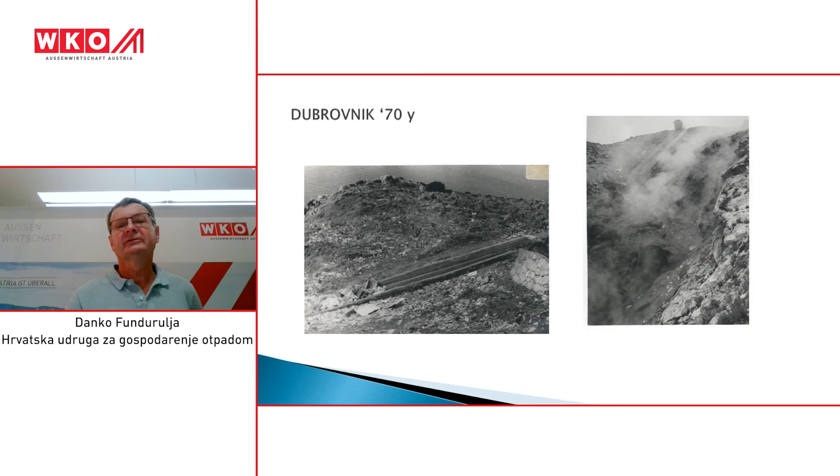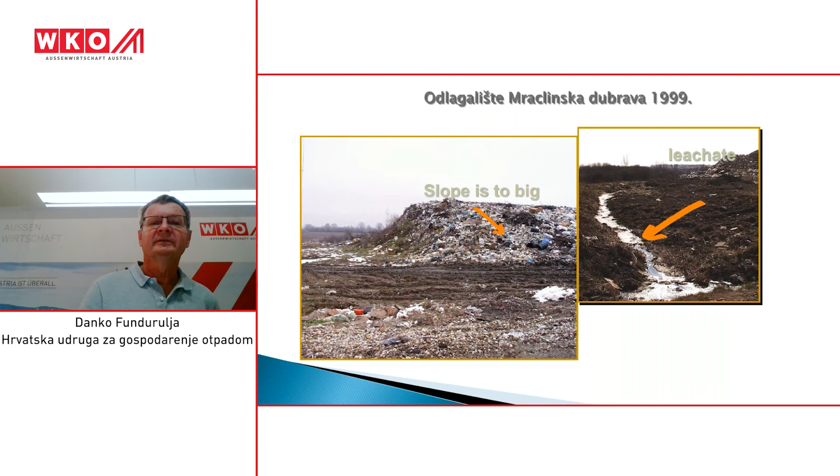Just to show you how it was earlier, especially on the coast - you have a very steep part where you dump your waste and burn it, and what didn't burn ended up in the sea. They always burned the waste at the landfill. This shows how it looked 20 years ago, and now it's remediated and looks like quite a nice place.

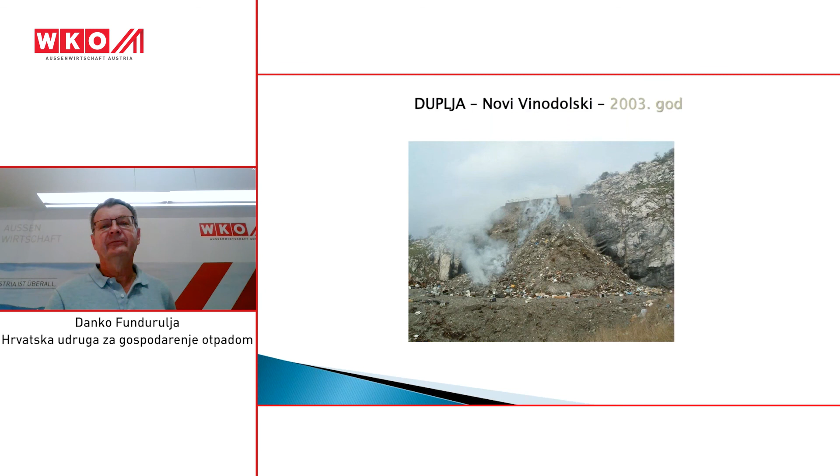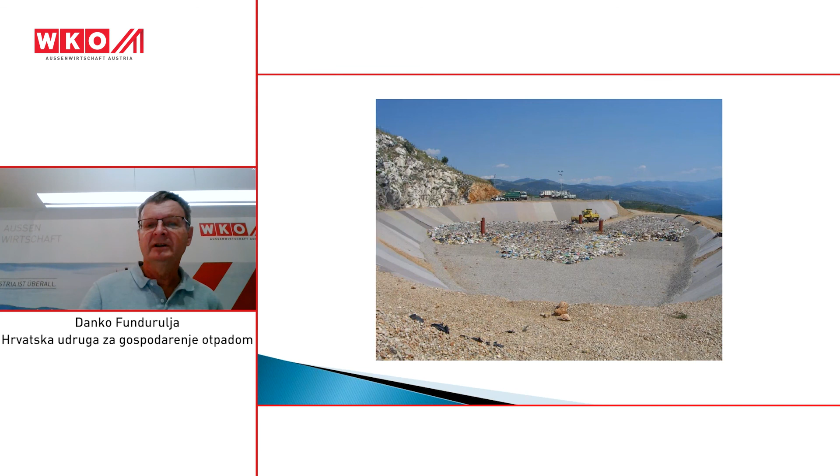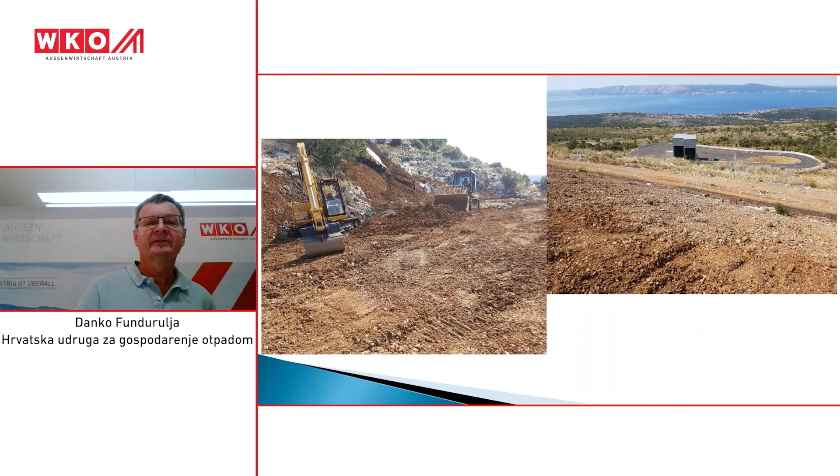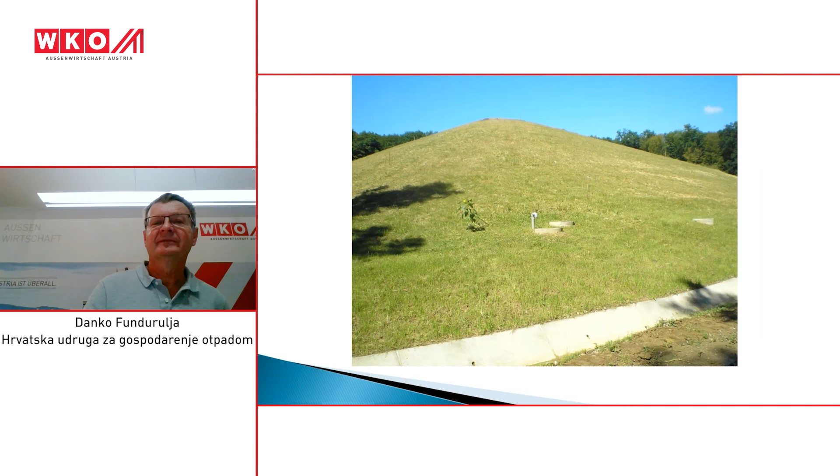Just some photos before I give you the chance to ask questions. This is on the coast - they found a big, deep hole and just put the waste in and burned it. In the last 15 years, remediation is almost finished across Croatia, and we've closed more than 200 wild landfills or open dumps. Just two photos to remind you how it was at the beginning of the 21st century, and how it looks now.

So thank you for your attention, and I hope you have questions - not too difficult.

Thank you very much, welcome. I think we don't have more time. Thank you very much for your time, for being here. At the moment I have no questions, but if there are any, I'm here. We will send you all the questions. I wish you all the best.